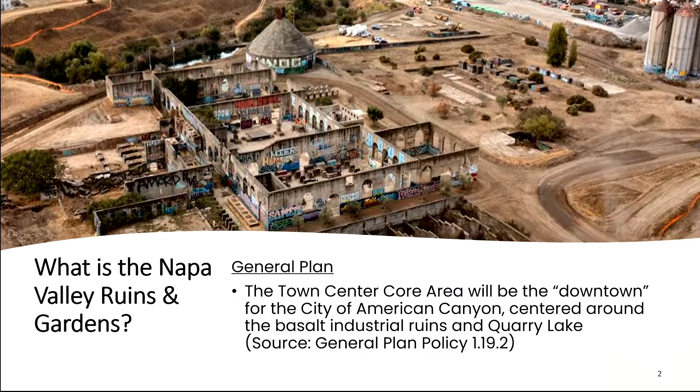So it's really been a core part of the general plan for a long, long time.

Another general plan policy relates to being a plaza to facilitate community gatherings and events, some of which already happen today, which are tremendous and a great contribution to life in American Canyon.

Along the way to developing the specific plan, there was a group of residents appointed by the City Council that formed the Watson Ranch Specific Plan Steering Committee, and there were a number of years of workshops to help clarify and bring into focus what this new community will be.

Much like you might expect from the general plan, the goal is to create an active, vibrant town center, visitor and local serving uses, gathering places for locals, and a unique place that's the gem of American Canyon. I don't think anyone would disagree with that.

The committee met about 10 years ago, so some of these ideas really endure over time. We, of course, have the specific plan today, and the Napa Valley Ruins and Gardens figures quite prominently throughout the specific plan document—it's described in a variety of ways.

Sorry about that, that sounds very urgent. The town center is the—I probably turned it off. Anyway, sorry.

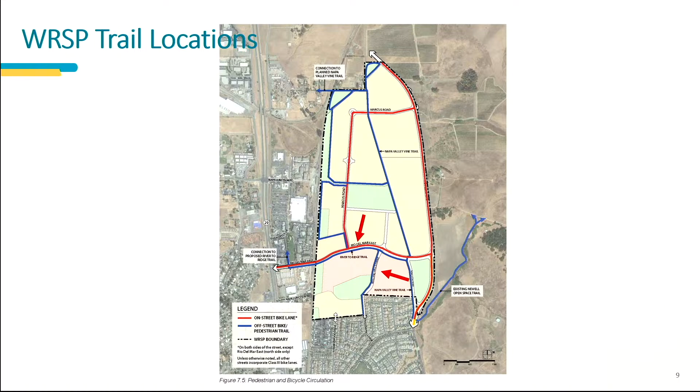So I kind of want to move on to a little more of the technical side of things. Shown here with the arrows, it's pointing out the north and east sides of the Napa Valley Ruins and Gardens. If you look closely, I apologize the map is a bit small, there are some blue lines that designate Class 1 bike trails.

So on the north and east side, it's surrounded by Class 1 bike trails. These are Caltrans standards for bike trails, just for information purposes for the Planning Commission. I know you're not engineers, and we won't be asking you to become engineers tonight. As our Public Works Director would say, it takes a long time to become an engineer - not that you're not good with numbers. I'm sure you are, but that's a quality engineers all possess.

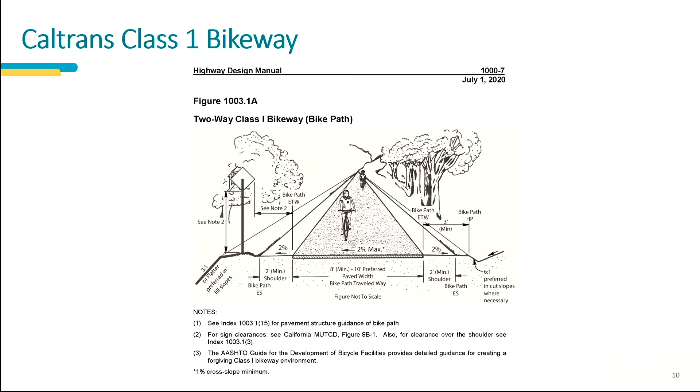Caltrans is an authoritative standard for all kinds of roadway mobility improvements, because folks that use state resources for mobility, if there's accidents, they come calling on Caltrans to do something about it. So they're very careful with their standards, and I wanted to share this with you.

The Watson Ranch trail itself is shown within the specific plan, and there are several types of trails within Watson Ranch. We have some trail shown with shoulders on both sides for a buffer for bicycle riding, and then there's a wider multi-use trail - the River to Ridge Trail. The northern side of the Ruins and Gardens is the River to Ridge Trail.

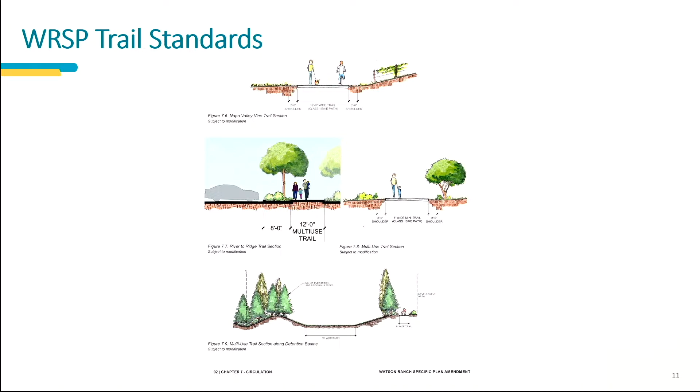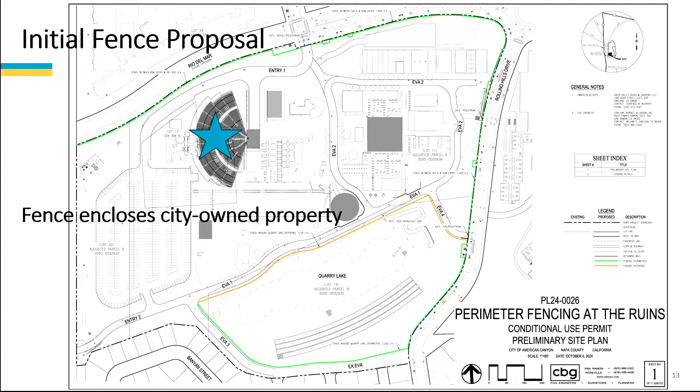Another aspect of this is the fencing encircles Quarry Lake Park. That's also privately owned, but the city has an access easement into it. So there's also an outstanding question about how that's addressed. I'm sure discussions and the like can take care of that.

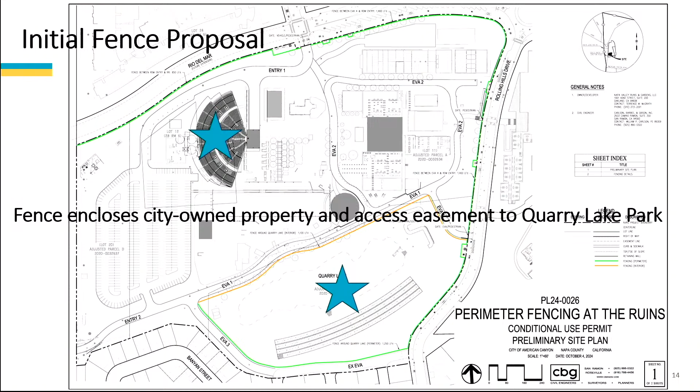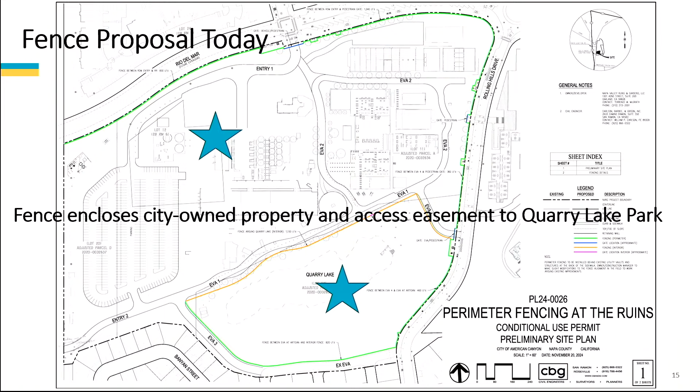This morning I received a new proposal, wanted to share with you. I'm not able to discern a substantial difference from the previous one other than the base map is different. So the same issues I just discussed with access to city property and Quarry Lake Park really haven't been resolved, at least with this morning's submittal.

One of the things that jumped out with the new one, which I appreciated getting this morning - before, with the old plan, it was kind of small and hard to read - the green line extended across the driveways for the vehicle access points. This new plan shows it popped out in blue.

One of the issues that's an engineering standard is there's always a stacking and queuing analysis necessary when access points onto private property are gated, because vehicles entering the property, if the gates are closed, could stack and queue onto the public street and cause a safety hazard. So that's something that needs to be evaluated in terms of where the gate would be located - a standard engineering safety issue that affects the public right of way.

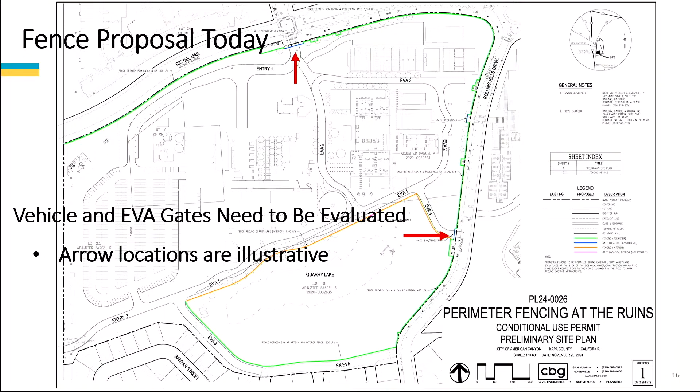I wanted to review with you some of the conditions of approval.

The perspective that staff took with the application is identifying any areas of minimum public safety, relying on engineering standards where there's no discretion per se.

One issue that's been a concern for the applicant has to do with the 2-foot setback along the property line. The reason is that if you're riding a bicycle, you might get distracted, lose control, and if there's a hard surface immediately adjacent to the trail, you could collide with it. Caltrans acknowledges this condition and says there should be a buffer regardless of the width of the bike lane for safety purposes. This is really background information for the Planning Commission, since it's built into the conditions of approval based on minimum engineering standards.

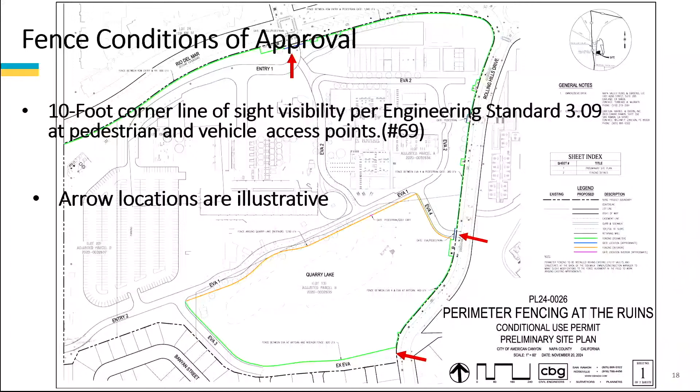Also, when the fence is near the property line, people leaving the site might not see folks as they step onto the trail, or might not see a bicycle coming from a distance. So there's a line of sight standard in our engineering standards that requires a visibility triangle at those locations so people can see in either direction and avoid collisions.

There are various locations along here where there are utilities, and in order for utility providers to access these facilities when they need servicing, there could be sharp 45-degree angles, which can be dangerous if you hit them. So we're recommending a 2-foot diagonal corner in locations where the fence changes direction at a sharp angle, as a safety standard.

There are also above-ground utilities in some locations. I've identified two, though I don't know if that's fully accurate - I think they're there to make the point that above-ground utilities exist. In order for the utility provider to access their facility, they need to be able to get around it, so the fence needs to be set back for service people to access the utilities. Five feet is the normal standard for public works staff, but we can't speak on behalf of other utility providers, so the condition says it's 5 feet or whatever the utility provider requires.

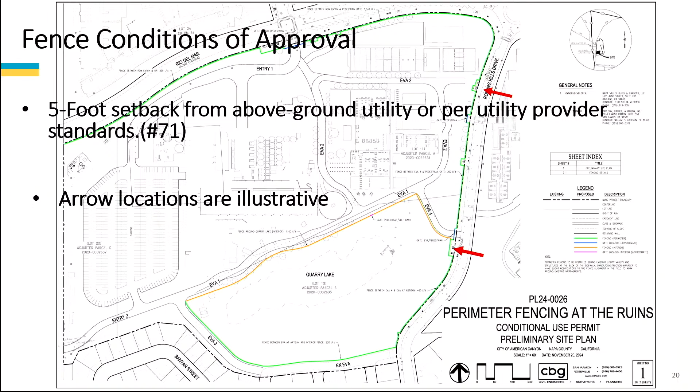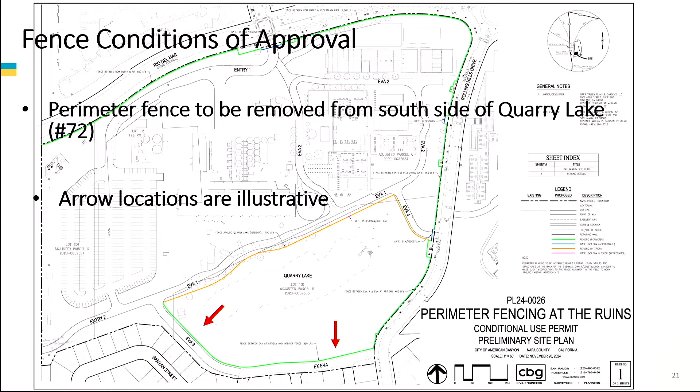One issue we raised with the applicant, requesting they amend their plan, had to do with the perimeter fence along the south side of Quarry Lake. The reason is to provide public access easements there. Today's plan still shows it, so there's a condition requiring that segment of the fence to be removed from the plan.

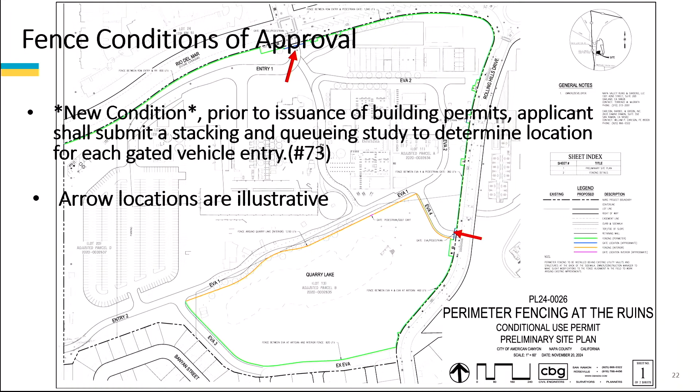Also, looking closely at today's plan, we're proposing a new condition requiring a stacking and queuing analysis for the vehicle entrances. I don't imagine there would be much issue with the emergency vehicle access, but that's the responsibility of the fire authority, who haven't been consulted yet - whatever their standards are is what would be analyzed, since we can't speak for a different agency. The other entrance provides access to the parking lot, and you can imagine a lot of vehicles, particularly with the venues at Napa Valley Ruins and Gardens, attracting many cars coming and going.

So I finally got around to the fence itself. This is a graphic provided with the application describing an 8-foot tall, untreated steel picket fence. The pickets are about 4 inches apart, and it would be located immediately back of the public right-of-way.

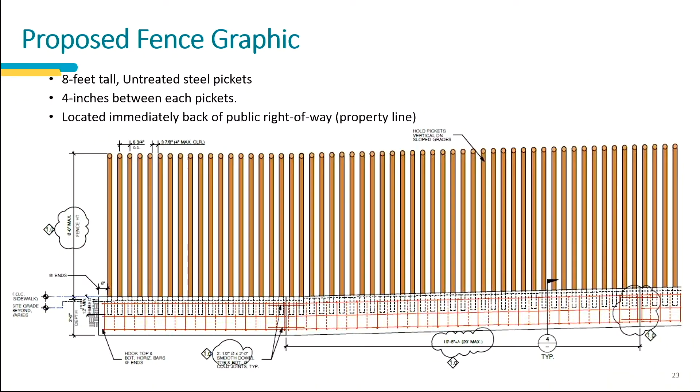So we get to the point now of what the Planning Commission is here to do. The specific plan designates that all architecture and site approvals require a design permit, and the zoning code delegates that to the Planning Commission.

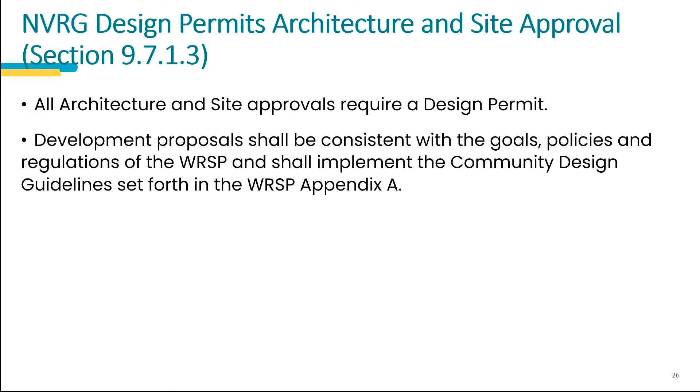The proposals that are received must be consistent with the goals, policies, and regulations of the Watson Ranch specific plan and the community design guidelines, which is in Appendix A.

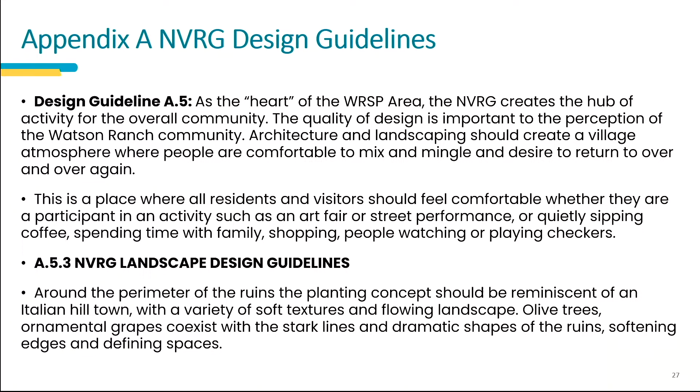Another guideline refers to the perimeter of the ruins. The planting should be reminiscent of an Italian hill town. A variety of soft textures and flowing landscape, olive trees, grapes, coexist with stark lines and dramatic shapes of the ruins, softening edges and defining spaces. There's a whole lot of other design guidelines as well. I included them in your packet, so I'm sure you've taken a look at that, but I thought I'd highlight a couple here to give a flavor for what's in the specific plan.

Another area that's important to think about is the development standards. It is zoned for Napa Valley Ruins and Gardens, and it has development standards. What's mentioned here is the setbacks are determined through a design permit, which is the application you're looking at tonight. It says building setbacks, but a fence is a structure, and the standard is flexible to accommodate existing ruins. So we have a very flexible standard with regard to setbacks.

So with that, staff is recommending approval of the design permit with conditions of approval. But I wanted the Planning Commission to know our review was to evaluate it for consistency with minimum safety standards, primarily those found in engineering standards. The Planning Commission has a different role, as citizens of American Canyon, to evaluate a project as residents and look at fulfilling the goals and policies of the Watson Ranch specific plan. So with that, I'm glad to answer any questions you have.

How do I get it up there? Maybe you have to close it. You have to close that presentation and open it. Can you assist him?

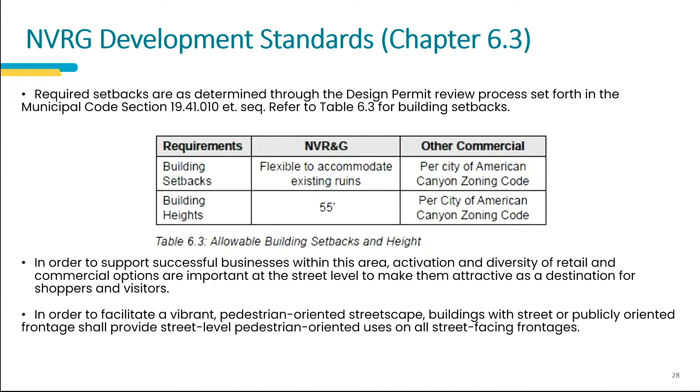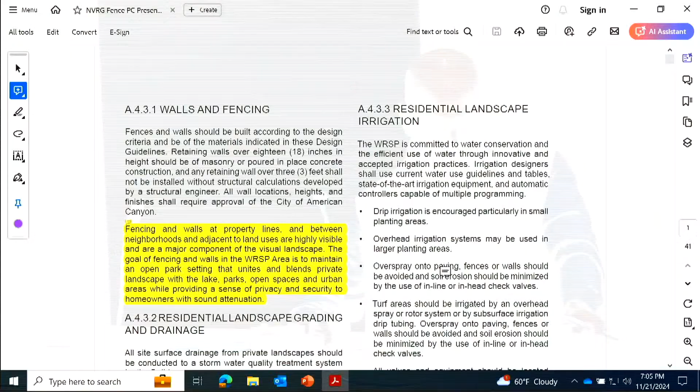There we go. So this is out of the specific plan. I'm going to try to start from the very beginning and take you through. Unfortunately, this is going to take a lot of time over what I consider to be an incredibly simple design permit application.

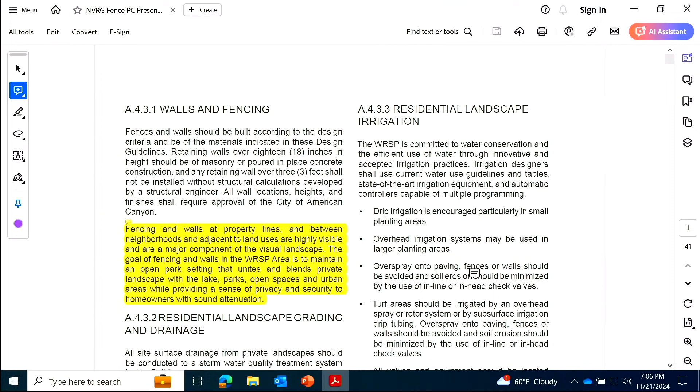Again, it's the most complicated process I've been involved with in this project over 20 years, this fence design. I'm not going to bore you with all the different issues here. Essentially, this talks about how the fence should integrate with the community. As I mentioned when you did the site visit, I've built something like this similar 25 years ago. The idea was you can see through it, whether you're inside or outside. You can't tag it, very hard to tag. You can't climb it, very difficult to climb. Fits with the aesthetic, and very, very low maintenance once you put it in there. It's really meant to stand the test of time, similar to the fence we built on the other side. But that fence is obviously more of a residential fence. This fence is really meant to have a connectivity to the ruins and gardens.

Brent made reference to this, but he didn't call it out specifically. This is right out of the Watson Ranch specific plan. View fences should be located along any property line between public and private property. That's right smack out of our specific plan. So this trail system that Brent gave you a very cursory overview of has 3 primary trails inside of Watson Ranch. One is a Class 1 that he mentioned, the Caltrans standards. That Caltrans standard does not apply to a multi-use trail or to the Ridge to River. So that whole process he was doing there was basically a shiny object, meant to deflect your attention.

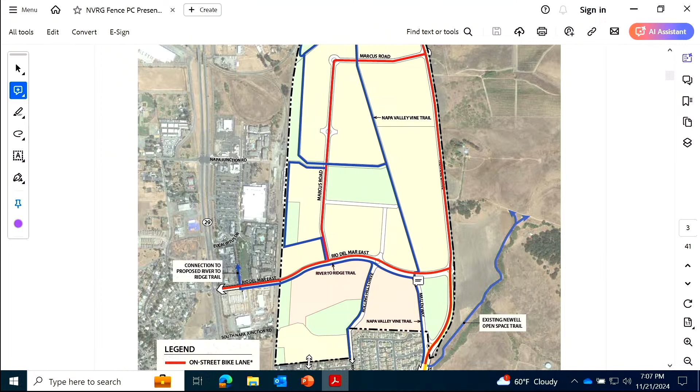So to date, we've built the Ridge to River from the intersection of Marcus all the way up to the intersection of Malin Way. We've built this section of the Vine Trail, which is a Class 1, from here to this intersection, and then this multi-use trail from the intersection of Rio Del Mar and Rolling Hills all the way down to the end of the project where it comes into Vintage Ranch. 3 different trail types.

Just to set the concept of vesting documents: the specific plan was approved in '18. The DA, which is a 30-year contract between us and the city, was approved in '19. We then revised the specific plan in '23, and we've been under construction for 3 years.

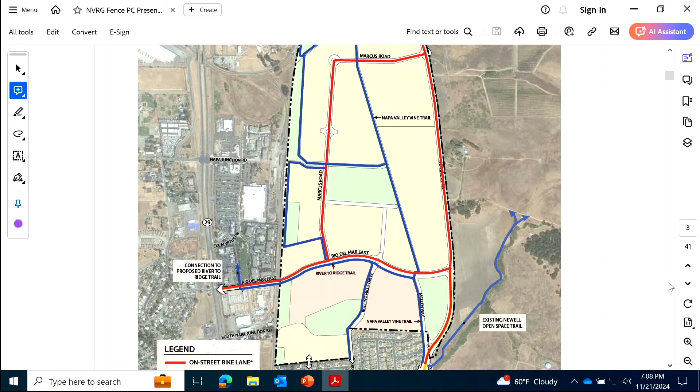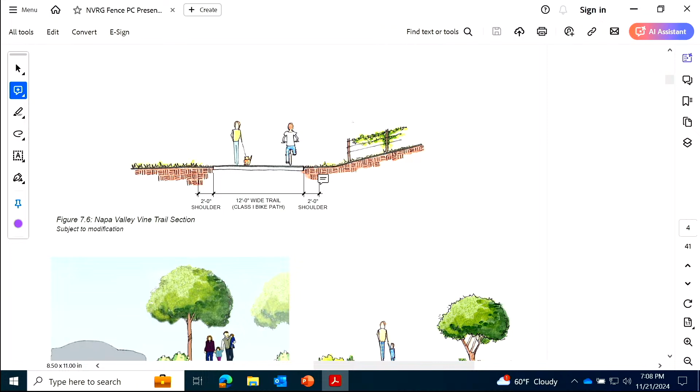Along that route, again, sorry to take you through all this, it is relatively painful. This is a Class 1: a 2-foot shoulder, 12 wide hard track or trail, and another 2-foot shoulder. That's the Vine Trail. That's what we built over on Malin Way.

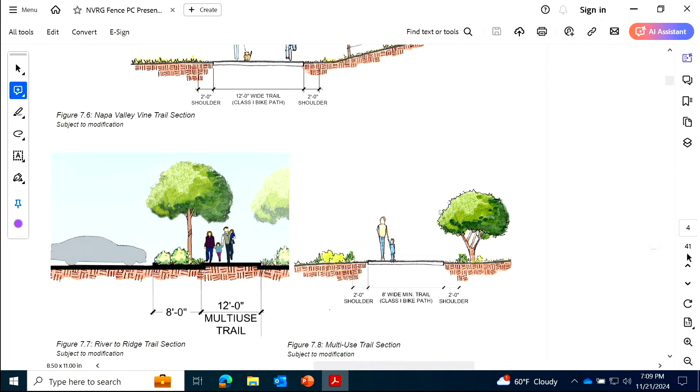I'll come around to this in just a second. The River to Ridge is 12 and 8, no soft surface. Soft surface shows a shoulder there on the Vine Trail per the Caltrans standards that Mr. Cooper referenced, which have no application whatsoever to the River to Ridge. And then the multi-use trail section here, on Rolling Hills Drive, which is a 2, an 8, and a 2. So keep those numbers in mind, because I'll come back to them in a second. Let's see if I can shrink this.

So this is Mallen Way. It's built. This is the new city park, or it's going to be the new city park. This is Promontory over here on our right. That's the roadway of Mallen Way. You can see there's your 2-foot shoulder, your 12-foot wide, and there's your 2-foot shoulder. That is built.

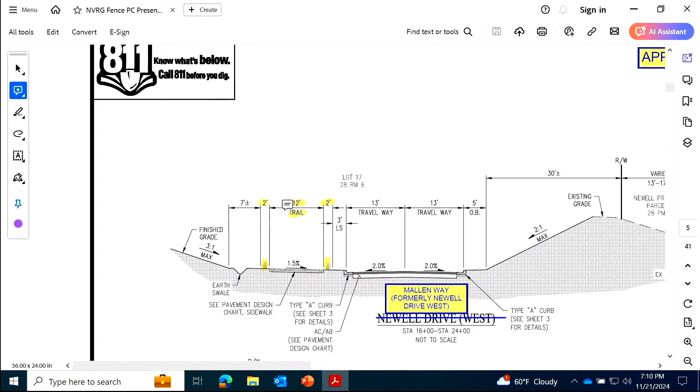In order to get that built, we spent 18 months negotiating with staff about the master backbone infrastructure: streets, curbs, gutters, light poles, park benches, landscaping, et cetera, that people are now driving on, riding their bikes on, pushing strollers on. That took us 18 months to get those plans negotiated with the city, approved, and then built. So that's what's built on Mallen Way. Let's see, let's go on to the next one. Let me see if I can pull this over here.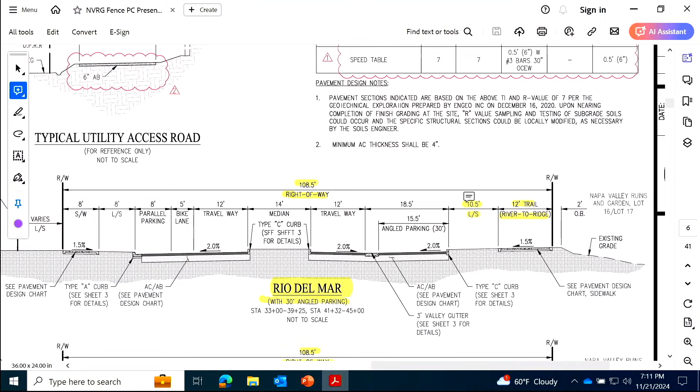And then look here, 10.5. The trail standard is 8, that's what's in the Watson Ranch specific plan. So how did it get to 10.5? How did it get to 22.5 feet versus 20? Any ideas, Brent? It got there because staff asked for 2.5 more feet, so that's an overbuild on that path.

So then going on down, let's see if I can find it here. Oh, there's Rolling Hills Drive. So on Rolling Hills Drive, this is 16 and 17, that's the hotel site. So again, that 2 foot is overbuilt. See that grade change? It goes down steep. Remember in the specific plan it calls for 2, 8, and 2 - that's 12 feet. Look what's there: 10 and 6, that's 16. It's an overbuild by 4 feet.

Mr. Cooper, how did we get to that extra 4 feet? It came through 18 months of negotiation, city staff requested it. It then got designed into the master backbone infrastructure, which got approved by staff, which we then built, which was then accepted by the city. All of these trails have been negotiated by the city, directed by the city, we built them, and then they get accepted by the city. The cow left the barn several years ago.

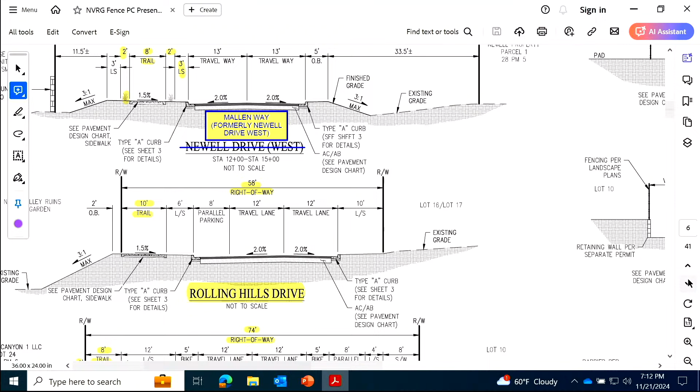Let's go on to the next. I don't know why it's blowing up like this. Mr. Cooper points out all these vehicular accesses - there's only one, it's at Marcus and Rio Del Mar. If the ruins are open, the gate's open. And the other ones are emergency vehicle access.

We've had numerous discussions with staff, and frankly, in my experience, in my skill set, in everything I've done both here and in other cities, this is all stuff that's negotiated at a staff level. It should never be in front of you, never. And I apologize for that, I really do. It's embarrassing that I have to be up here doing this.

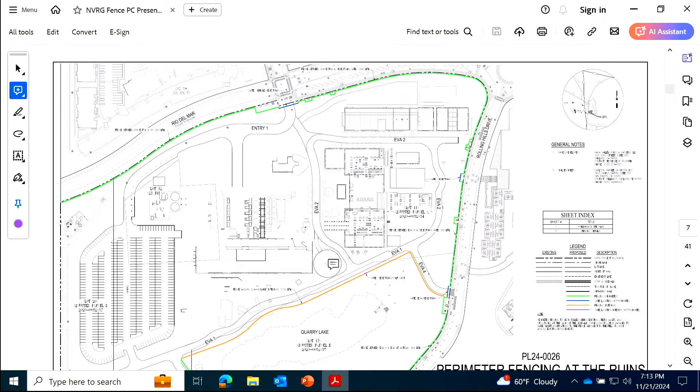And Mr. Cooper also mentioned the city square. In our updated specific plan, that 2 acres is going away. The city's not going to own property inside of the ruins, right, Mr. Cooper? It's moving over to the park site on the other side of the hotel, in Parcel A. And I don't believe the city has an easement into the quarry lake either. And if you want to talk about public safety - taking this section of fence out around the quarry lake, if it's not part of this, then I'm giving that land to the city. The city's buying that land from me because they need to take that liability.

They need to insure it, and that is a big issue. You talk about safety standards, and you're sitting here focusing on 2 feet, and you've got a lake there that's open to the public that has 50-foot cliffs. Embarrassing.

So what we've proposed is that we build this fence, and one of the conditions of approval is that we have to submit a landscaping plan for this fence, for the ruins. It's funny, I moved 100 olive trees in there last year. I don't remember staff complaining about that or asking for a landscaping plan to go behind it.

So what we've proposed is outlined in green. The red is, in theory, inside of the ruins, that's on the cliff side. So in theory, staff wouldn't have purview over that. But it is really, really important that this fence gets built, because we can't do construction, we can't secure the site, we can't open the site.

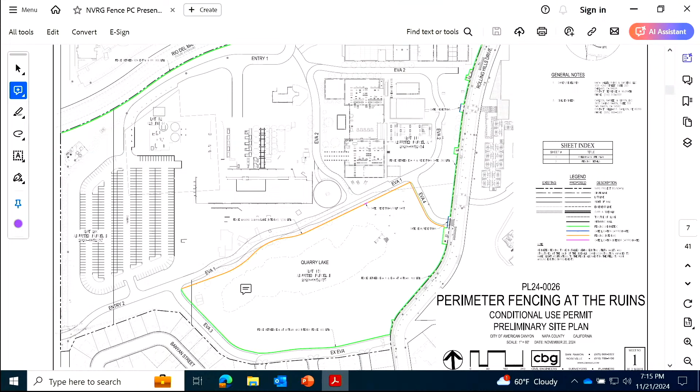We can't do anything. The other day, Saturday night, I got a bunch of pictures - there were 50 kids having a party in here. The week before, there was a party of 25 down by the lake at midnight. And you're worried about setting the fence back from utility boxes? If you drove out there today, you'll see the temporary fence is actually set back from all those transformers by 5 feet. Did you notice that, Brent? And those utility boxes are on private property, by the way.

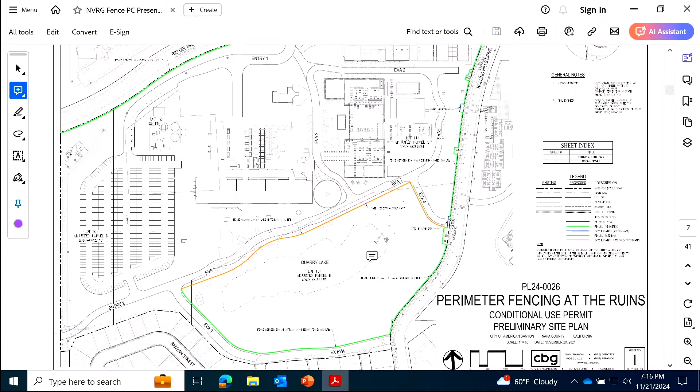I'll just refer to it as staff then. Thank you, Bob. Mr. McGrath, before we proceed, let's speak with respect and decorum. I understand you're giving us the information we need, and I respect that, but let's please not point at people and name call. I apologize. We will continue.

I apologize, we'll be professionals here. Thank you. What I'm trying to do, sorry Chair, is just point out that none of this was in the presentation, and this is absolutely fundamental to this presentation. I'm sorry for referring to Mr. Cooper personally, but I'll use city staff. Thank you.

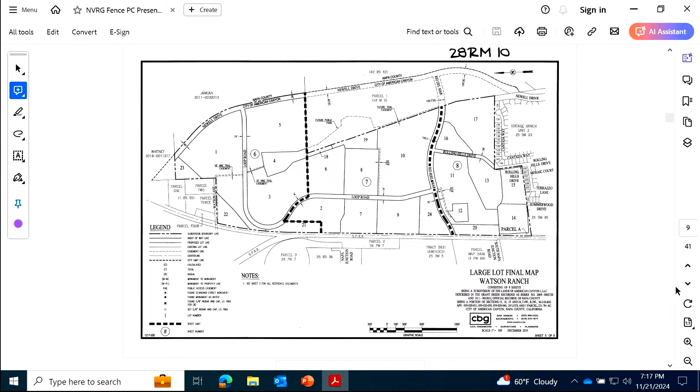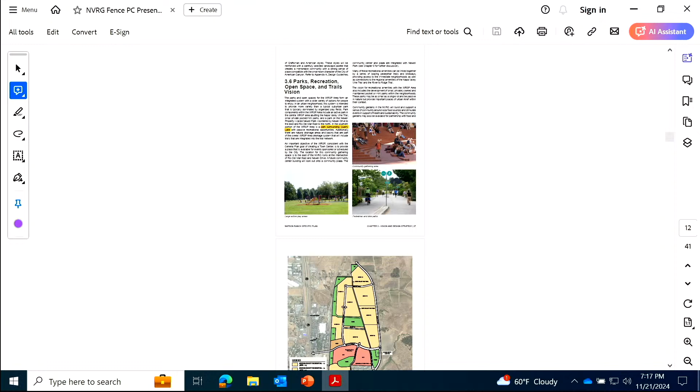So these are all the references in the Quarry Lake, and again I'm not going to bore you with them. Let me get it back up to full size. So you saw this earlier. Again, I'm not going to bore you with the details. I built a fence very similar to this 25 years ago, and it's a beautiful fence. It's still there, very little maintenance.

I think this meets all the goals of the specific plan. It's not a cheap fence to build. It's actually a very expensive fence to build. So let me... this is important because this sort of summarizes the whole thing. Again, let me see if I can get this so that everybody can see it.

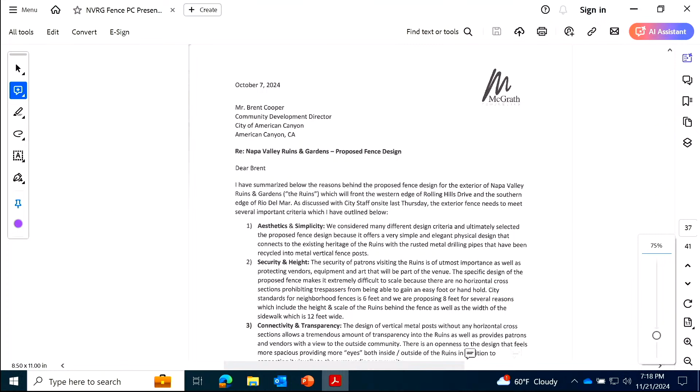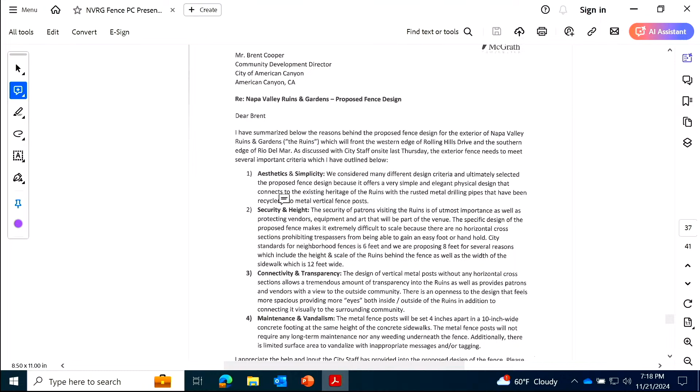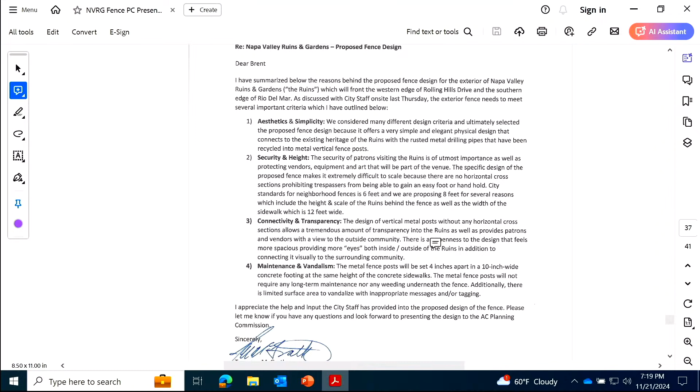Staff had asked me what the purpose was, what the design concept behind the fence was. Obviously aesthetics and simplicity were really important, security and height, connectivity and transparency, and maintenance and vandalism. Those four things were really important. They come right out of the specific plan, but it's also recognizing what the ruins are and what they're going to be used for, and how we can meet all those standards and also create what I consider to be a piece of art.

This is a subsequent letter that we wrote to staff, and in it it goes through all the different issues. I talked about one, which is the walls and fencing. I talked about the standards. I'll get around to land dedication here in a second, and maintenance. For instance, Artisan, which is an approved project that backs up to Rolling Hills Drive, which backs up to the multi-use trail, has no setback, zero setback. And that's an existing condition out here that the city staff approved.

I'll come back to landscaping and irrigation. Topography, I mentioned there's a lot of topography along Rolling Hills Drive and Rio Del Mar that makes doing what staff has asked for really difficult. I also mentioned to the commissioners who toured, I think adding two feet is a dangerous condition. I think the transition between a hard surface, that corner of concrete, to a soft surface is actually where you catch a tire and that does eject you into the fence. So I actually think it's very counterintuitive to do it. I mentioned it creates a natural skate park, a natural skate ramp if you add a two-foot fallout shoulder on the other side.

Trash, if you start landscaping it, you're going to have a lot of trash collecting at the bottom of it, and so on and so forth. Post-event, people are going to find the shortest route home, and the landscaping is going to get trampled.